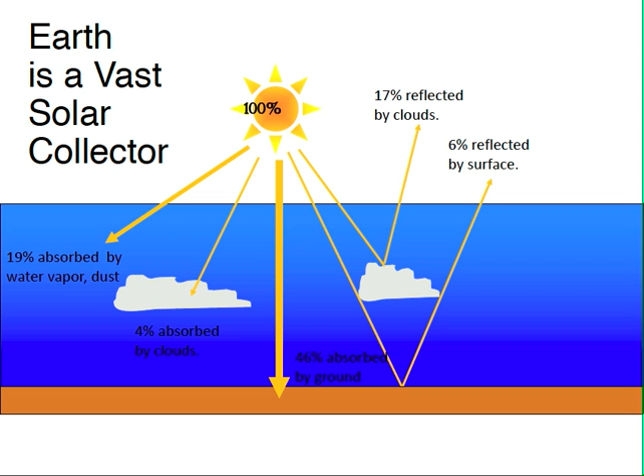Well, let's jump into what is geothermal. We need to understand some of the key traits that go into geothermal and why we design and utilize it in our recommendations. The first thing to understand is that geothermal is technically classified as a solar technology by the DOE. This slide reveals that 46% of the energy emitted from the sun is stored and retained in the ground. I often tell people that you and I walk, eat, sleep, drink, and live on the largest storage container, or battery if you will, and that's the Earth. That is what we're going to be tapping into in this geothermal technology.

Everybody has a heat pump, and we're going to utilize heat pump technology in geothermal. Oftentimes when I travel throughout the north and New England areas, they'll say, we don't want a heat pump. But in reality, everyone has one in their home in the form of a refrigerator. And if they're properly designed and installed, they can work very effectively. Air conditioning is the same thing.

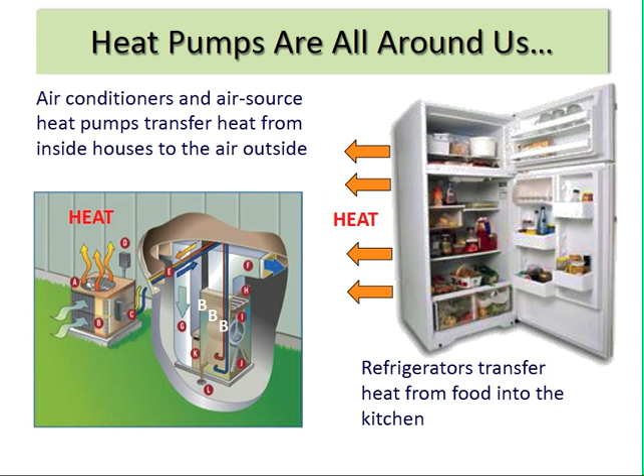In heating and air conditioning, the true science is that we're moving energy, we're moving heat. That's what we're going to do with geothermal. In this illustration, we're going to move that condenser that we normally set outside by the bedroom or deck where they least desire it, and we're going to utilize the ground instead. So we're going to couple with the ground with a loop. In essence, I'm going to put the condensing unit in the ground, I'm just not going to put the copper and the Freon in the ground. I'm going to be utilizing polyethylene pipe and water, oftentimes with some type of antifreeze solution mixed in.

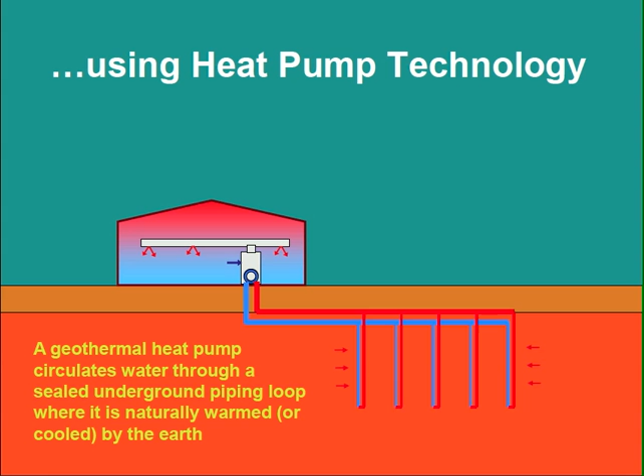Let's take a look at why that's effective. The ground temperature in this illustration—we're in the heating mode, and we're going to extract heat from the ground. In a typical heat pump, we're extracting heat from the outside air. In this illustration, we know from experience that when we need the most heat, it's generally the coldest temperatures outside, which means the outdoor unit, the regular DX unit as we refer to them, is least effective.

But in geothermal, I'm dealing with an environment that's generally around that 50-degree range. Why should we utilize high-quality fossil fuels, mobile fuels capable of burning at 1,000 degrees, just to heat a building to a low temperature barely above what's in the earth right below it? It'd be like making electrical wire out of silver instead of copper—it works great, but it's a waste of a precious resource.

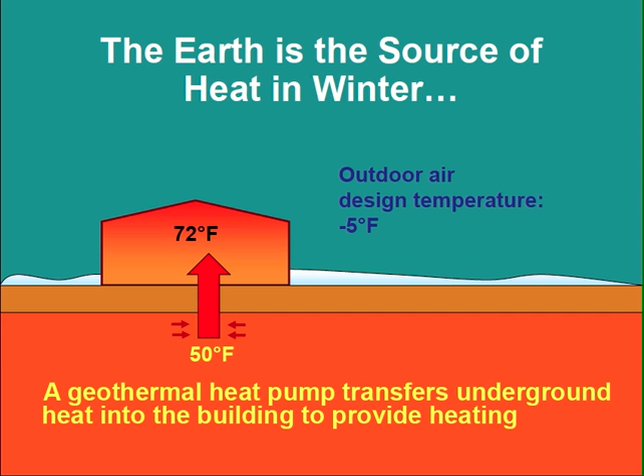And that's why we're looking at geothermal. In the summer, with the geothermal system, we're simply going to reverse the cycle, and we're going to reject heat into the earth, which is at a more constant temperature and closer to the temperature of the environment we're trying to create in our home or our buildings.

We're going to utilize water, which is one of the most effective means of transferring energy, versus air, which is one of the least effective means of moving energy, which is typically what we use with our DX systems.

And you say, well, how do you know that? Well, a simple illustration would be, if I went outside a few weeks ago when it was still in the mid-50s to low 50s, and I only had my gym trunks on, I would have been able to stand it. I wouldn't have frozen to death. I'd have probably got chilly, but I would have been okay. It wouldn't have harmed my health.

However, if I go and jump into a lake that's 50 degrees, I have literally maybe minutes, possibly seconds, to get out of that lake before hypothermia and death starts setting in. It's just this very simple example of how water transfers heat energy much more effectively than air.

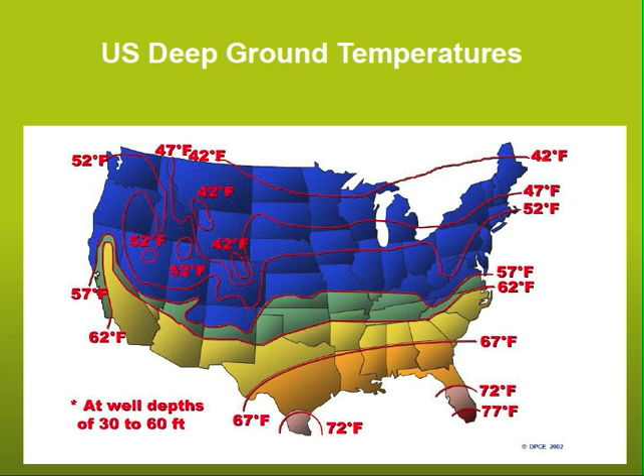In the next slide here, we see what the constant temperature of the earth is across the United States. You can see from this that this is a technology that works anywhere in North America. Above mid-Tennessee and up, it's going to be in the 50s or to the low 40s, all the way down to Florida at the tip, up in the 70s, all of which are very near the temperatures we're trying to generate within our building and home spaces.

Well, is there really a need for geothermal? Why do we need that? One of the biggest drivers of this whole conversation with geothermal and this technology is the conversation of energy. Energy has been defined as the ability to do work.

If we were to look at an example of how energy works, let's run through a cycle. Oil burns to make heat. That heat will boil water. The water will turn to steam. Steam pressure turns a turbine. A turbine turns an electric generator. The generator produces electricity. Electricity powers light bulbs. Light bulbs give off light and heat. And thus you have, if you will, the cycle of energy, the cycle of life for one path of energy that's going on.

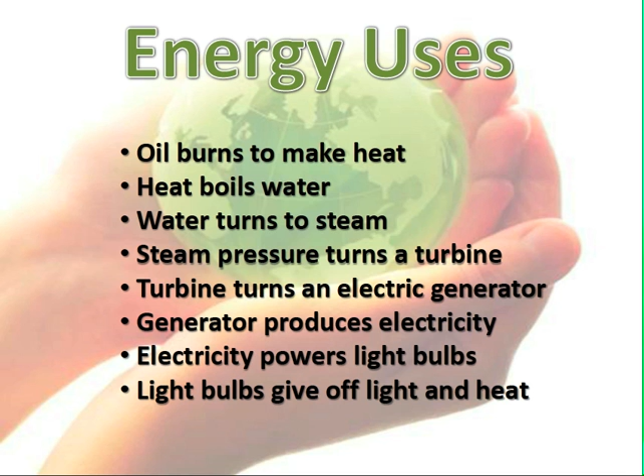When we enter into an energy discussion, there's always two types. One is the renewable type, dealing with wind, water, sun, vegetation, and internal earth. You can see we're dealing with everything from hydropower to wind power to biomass. Internal earth deals with geothermal, but it's different than the geothermal we're discussing today. We're not talking about the hot gases that come out like in Old Faithful out there in the park. We're dealing with transferring energy into the Earth's surface and also with solar energy that's being stored there.

On the renewable side, there's also a non-renewable side, which is what the majority of energy sources are today, including our oil, gas, coal, and nuclear energy. 41% of the energy used in the economy is in the commercial and residential sectors, and that's what we're going to be focusing on, primarily the residential sector here today, but we're focusing on both sectors with geothermal.

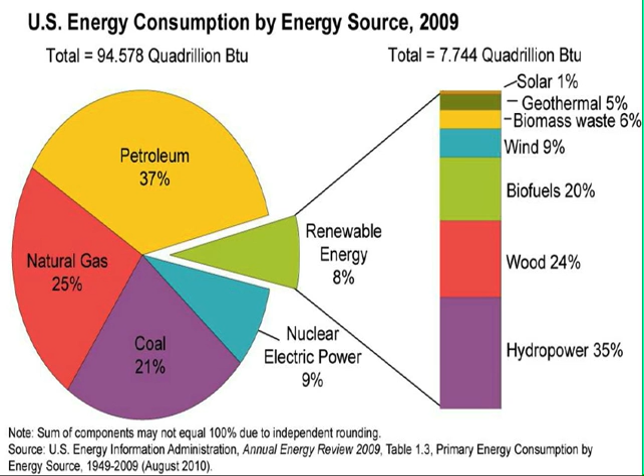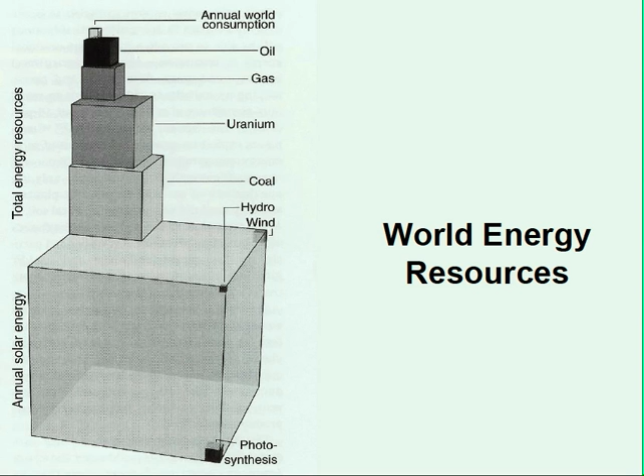What really interests us, and should interest you and your clients, is the large bottom cube - that is the solar energy falling on the earth every year. This is where we need to be looking at how to tap into that box of energy with all that we're doing in our buildings.

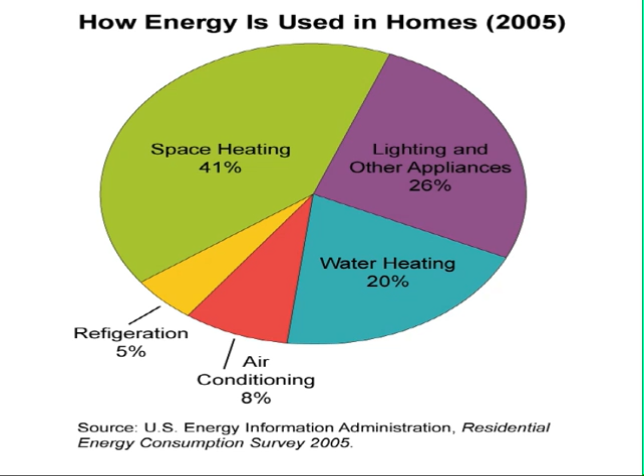Well, how is energy divvied up within a home? This shows that 69% of the energy is utilized in the HVAC and hot water realm. So that's what we're going to talk about today with geothermal - how do we minimize that energy being used in that 69%. This slide shows, and we'll unpack in the next few slides, how we can take that 69% and glean about 49% of it from the earth with this process.

We can take that HVAC that was at 49% down to 15%. And we can also take the hot water that was at 20% all the way down to 5% with geothermal technology. Well, you say, Richard, how in the world are you going to do that?

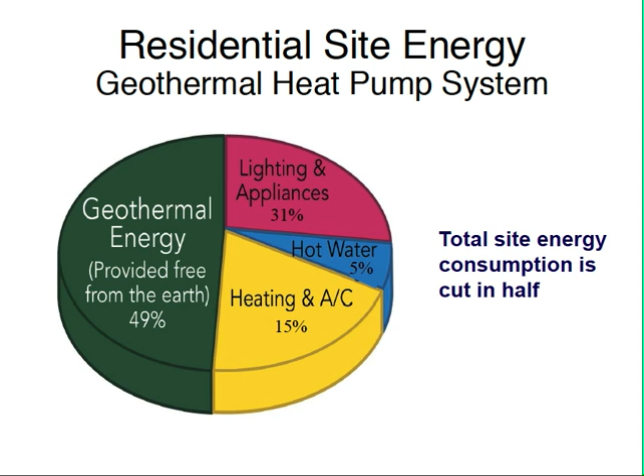Conceptually, when you look at this process, we're going to take 1 kilowatt of electricity generated by the grid. We're going to utilize that to power our pump, our compressor, and if you have a water-to-air type system, we'll have a fan moving air inside the home.

Take that 1 kilowatt of energy, and we're going to move it through the ground with water, and we're going to take out of the ground, as this slide shows, anywhere from 3 to 5 units of energy from the ground, which means we end up with a system that has an efficiency of 400 to 600%, or in the heating and air conditioning world, we refer to that as a COP.

So you can see the typical annual energy savings from these range anywhere from 30 to 60%. They're a very, very high efficient technology and process of conditioning homes and buildings.

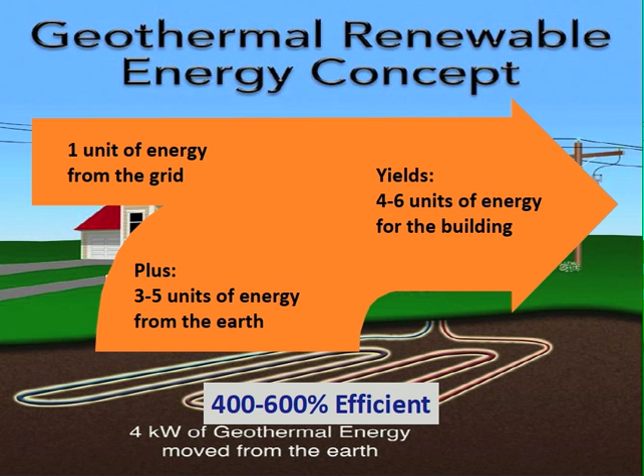Well, we've established that yes, the process is viable, that there is a need, but now we've got to go in and present this to our clients.

Throughout this process today, when I think about the sales process, I boil it down to probably two types of selling. One is transaction-oriented selling, where the only thing you're concerned about as a sales associate is that one transaction while you're there - after that you really don't care. Or there's the relational selling model, which is where we see a lot of models being built and modeled against, and that will be the foundation of our thought process throughout the remaining discussion here.

Unfortunately, there's a majority of HVAC dealers that don't give their customers any choices. You realize HVAC is in the top 5 most expensive purchases any homeowner will make, and they don't know all the choices they have. That's why they have you there, that's why they've called a professional. And as a professional, if we only go in and give them one choice, perhaps we've made the wrong read on that customer, perhaps we've not given them all the information they need, and we're working out of assumption.

So I want to highly encourage you in your sales process to give them choices. One way of doing that, which has been around in the industry forever, is giving them a good, better, best option.

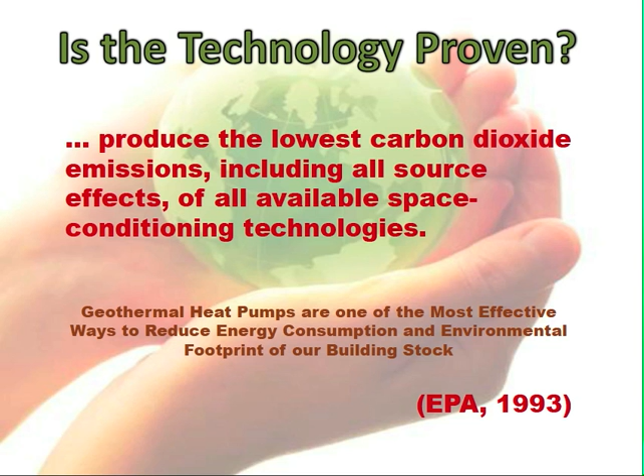One of the first objections is: is this technology proven? Is this something viable? Well, it's definitely not new. The first recorded patent was in 1912 in a Swiss lake with a copper tubing loop. In 1993, the EPA produced a statement that said geothermal is basically the best, most proven technology to reduce carbon footprint and energy usage.

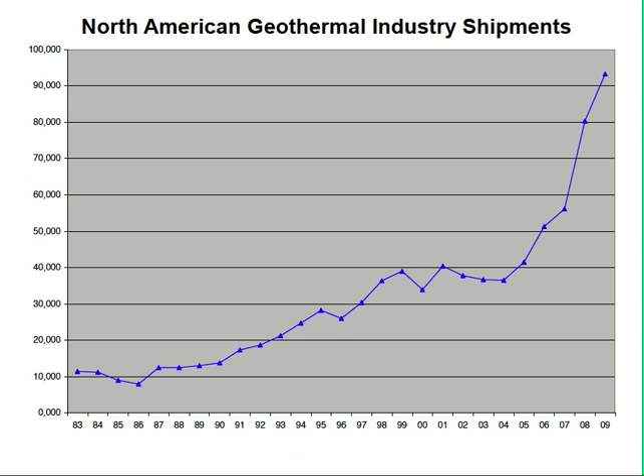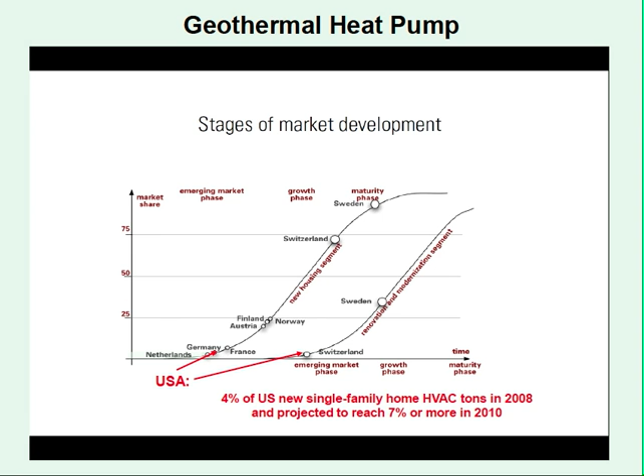You may be familiar with the product life cycle curve, which is portrayed here. You can see where geothermal is at globally on its curve, and it's not peaked anywhere. The most mature market is Sweden, in the low 90%. But here in the United States, a 100-year-old technology, we're still on the beginning cusp of this technology continuing to model what has gone on throughout the rest of the globe. That really excites me about this business and geothermal that we're in.

There are over 1 million geothermal installations, and the total installed annual energy savings is about $8 billion worth of kilowatts of electricity, or 40 billion BTUs of fossil fuels. It's going to reduce our reliance on imported oil by 21.5 million barrels of crude oil a year. It's huge, the prospect of what is happening with geothermal.

One of the other major objections you and I will face in any sales orientation, but also with geothermal, is price. This is probably the biggest objection that not only the potential buyer has to overcome, but you as well. If you haven't dealt with this one yourself, you can't help your customer deal with it either. Gene Mauch, one of the winningest coaches ever, said you can't lead anyone further than you've gone yourself. So I want to take the remaining 5 or 6 minutes and unpack the economics of this price—how do we overcome that?

When presenting geothermal, we need to present it from a perspective of return on investment, or ROI. No matter whether they're financing it or paying cash for this system, we need to approach this technology from a return on investment. A proper discussion also includes the total cost of ownership and what's wrapped up in that.

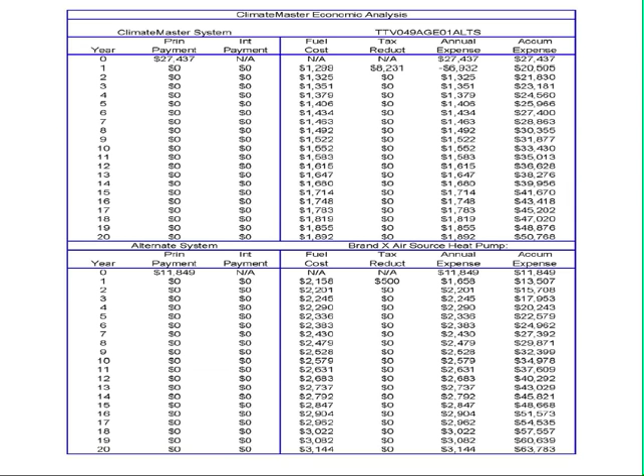It's very, very important, as we've discussed, that you have some type of financing available for your customers. There are a lot of different methods out there for you to do this, so make sure that you have that available.

Because the goal of everything we've spoken about today, in this really short period of time, is applying the Benjamin Franklin method. That quote was often related by Zig Ziglar, who said, you can have anything in life if you will just help other people get what they want. And Tony Alessandra said your professionalism is defined not by the business you're in, but by the way you're in business.

If you will adopt, perfect, and even enhance a lot of the conversation we've had today, I guarantee you'll be well on your way down the path of success, not failure, in establishing a geothermal product line and business as part of your portfolio and offering for your customers.

Well, I realize we went rapidly through this, but there were a lot of things I felt were necessary to include for you to download and unpack later, whether through our webinars or otherwise.